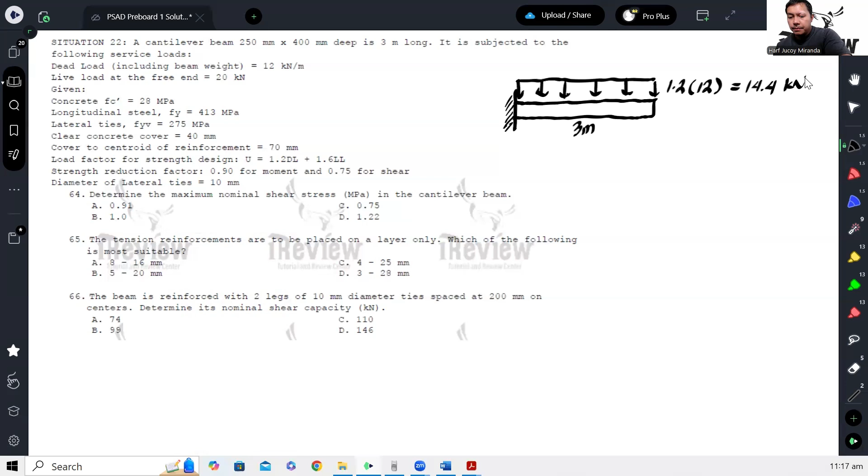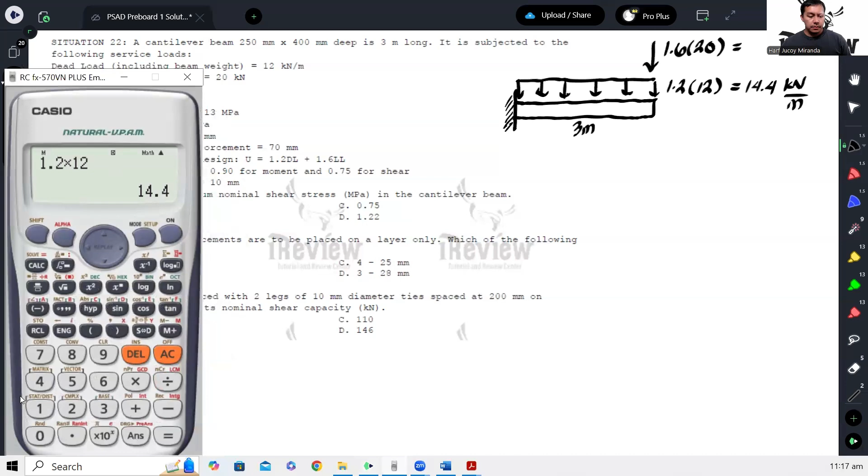Then there's a live load at the free end. So again, let's factor it, 1.6 times 20. Okay, so that gives us 32 kilonewtons.

So for the first question, number 64, determine the maximum nominal shear stress in the cantilever beam. So if we look at it, what is being asked, maximum nominal shear stress. So that means we need to compute the shear stress, which is basically the...

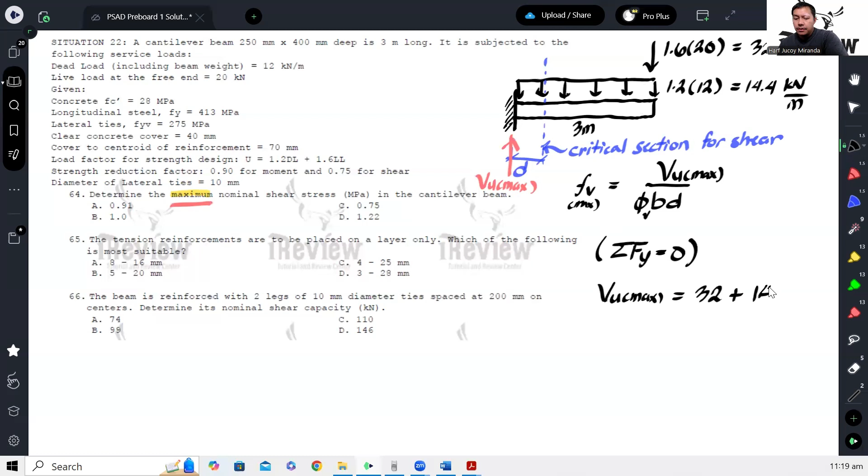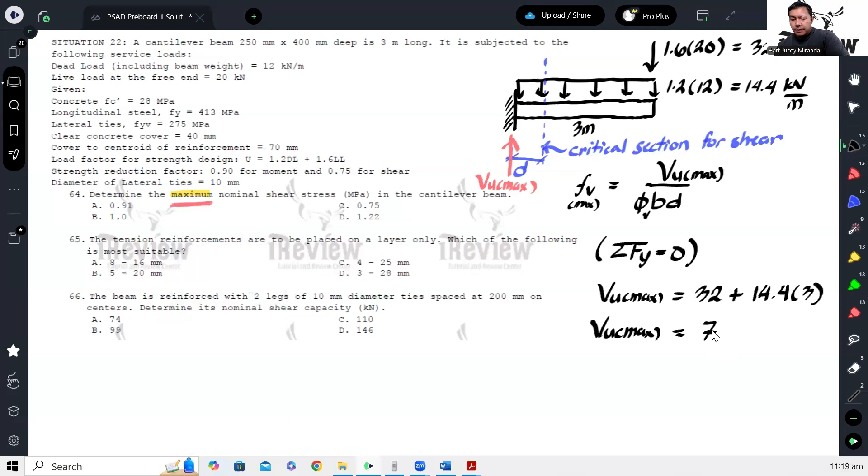Basically, we'll just sum up the forces on our beam. So we will have VU maximum equal to 32 kilonewton plus 14.4 times 3 meters. Okay, and that should give us...

75.2 kilonewtons. So therefore, our maximum shear stress is equal to 75.2, let's convert to Newton so the answer is in megapascal, over 0.75 times B times D. Now for our D, the cross-section, according to the problem, the height is 400 and the base is 250.

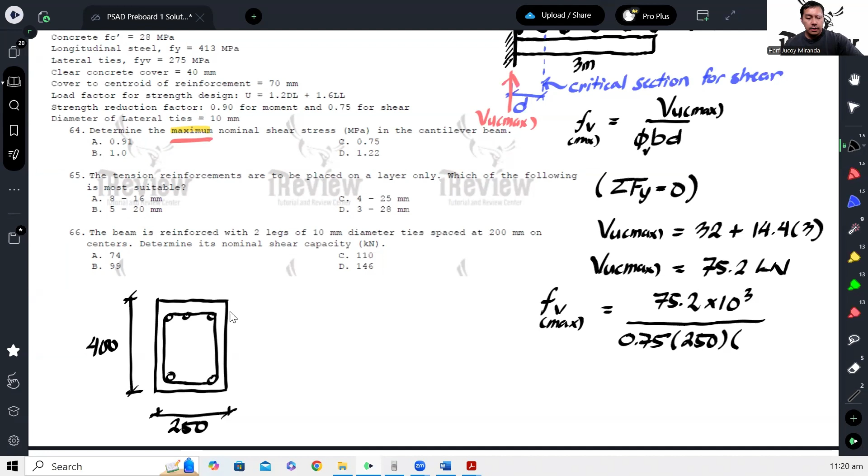Okay, and because this is negative bending since it's a cantilever, the tension side is at the top. So imagine that's the reinforcement there. So the effective depth will be measured in this manner. We'll remember that effective depth is always measured from the extreme concrete compression fiber.

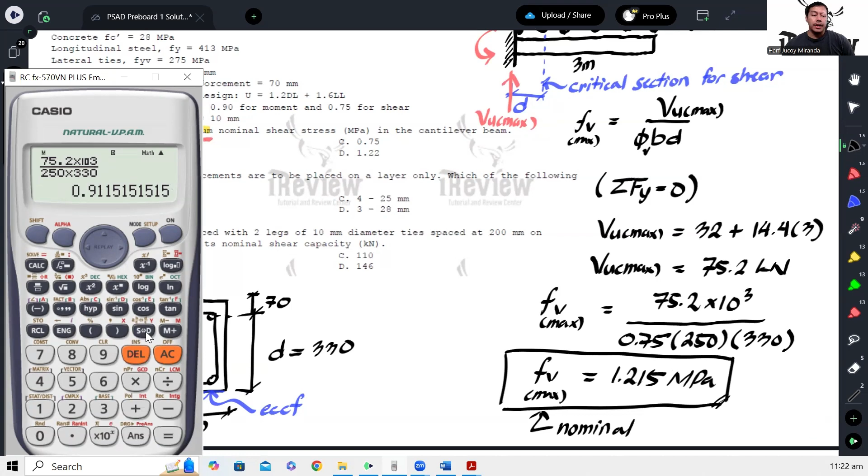And that gives us 1.215. So this is nominal, okay, nominal. If what's asked is ultimate, you just remove this. So that's the ultimate shear stress, 0.91. This one is the nominal.

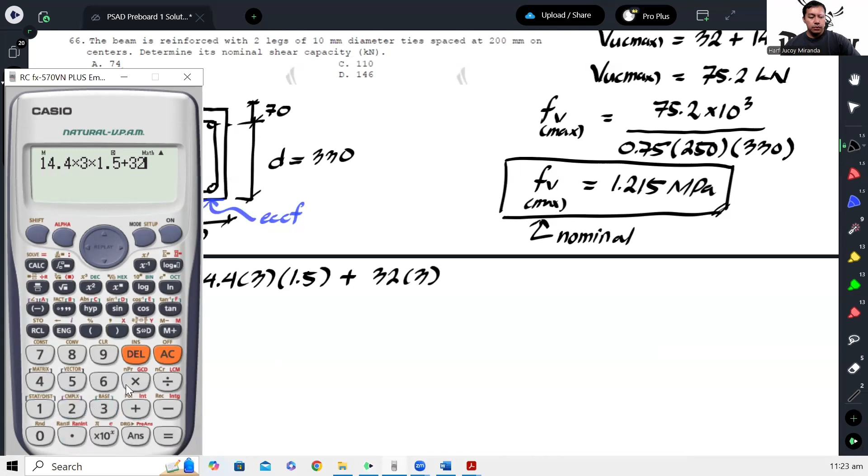So this gives us an ultimate moment of 14.4 times 3 times 1.5 plus 32 times 3. Okay, and this gives us 160.8 kilonewton meter.

So now that we have MU, this should not exceed our design capacity, which is phi Mn. The phi given is 0.9 according to the problem, which means our approach here should be tension control. So tension control, all right, how do we solve that?

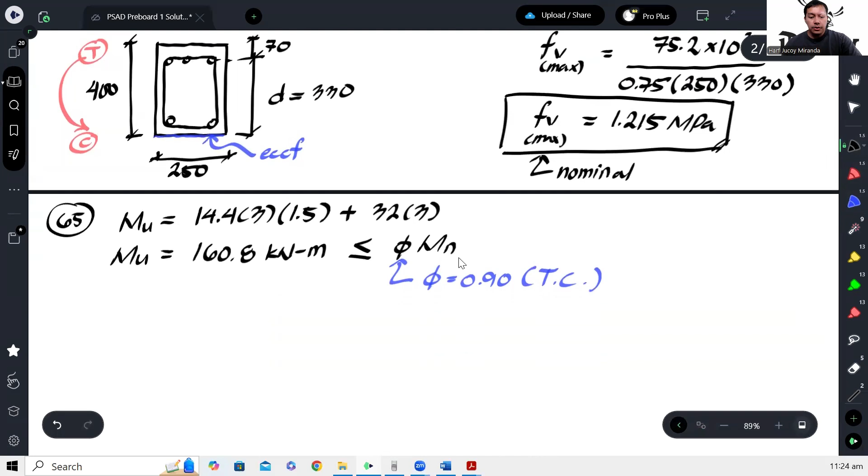Going back to the basics, here is our cross-section, let's say here is the steel bar. Because here is the neutral axis, and here is the compression side, here is the depth of the compression block, let's call this A. This becomes our compression, which is 0.85 FC prime. Then here is the tension of the steel, T, and here is C.

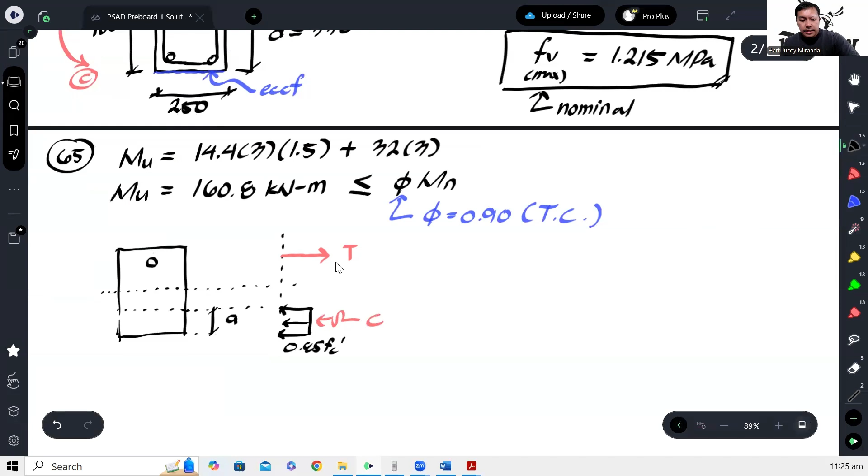So our first goal is to find the depth of the compression block. The distance is always A over 2, so D minus A over 2. To calculate the depth of the compression block, we take moments about T since we don't have a value for T yet. So we take moments here, and C times this moment arm gives us the nominal strength. So the nominal strength formula becomes C times D minus A over 2.

What is C? C is the stress times the area of concrete under compression. That area is B, which equals 250. So we have, up here, 0.85 FC prime times the area, which is A times B, times D minus A over 2.

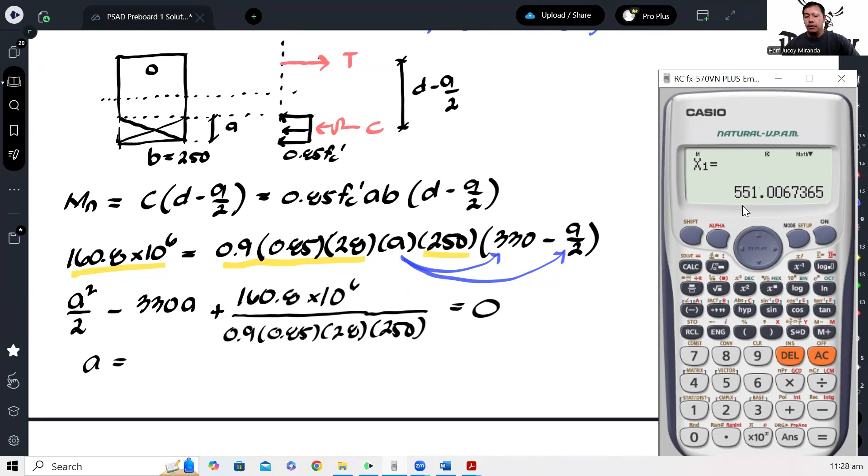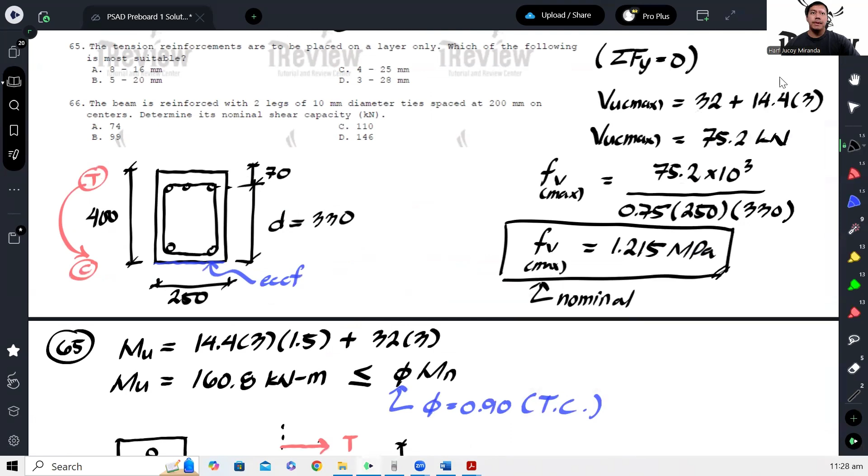So we can now solve for A. There will be two values since it's quadratic, but only one we accept. Using the quadratic formula: 1/2 negative 330, plus or minus 160.8 million over 0.9 times 0.85 times 28 times 250. Our answers are 551 and 108.99. We won't accept 551 since our depth here is only 400. So the solution is 108, or approximately 109, let's just use 108.99.

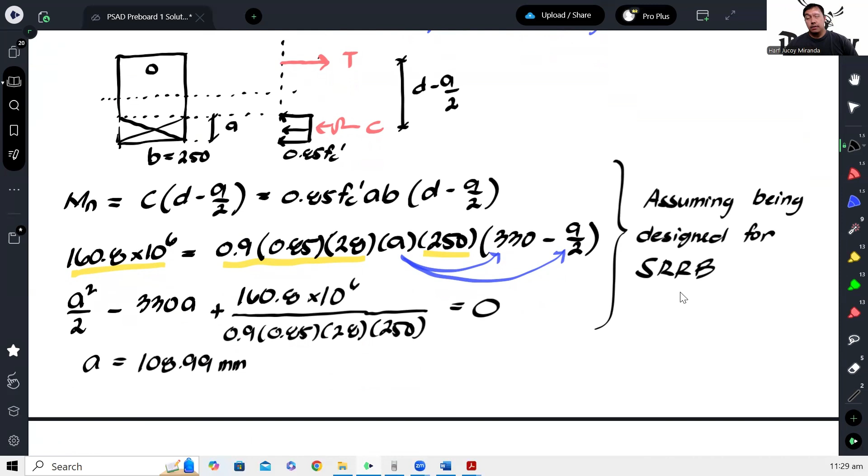Or the easiest way is to just compare it to the maximum depth of the neutral axis, which equals 3/8 of the effective depth. This is if you are designing for tension control and steel yields. The other one, 3/7, is if you are only designing for steel yields, but that's not tension control—that's actually transition failure, or should be the transition zone.

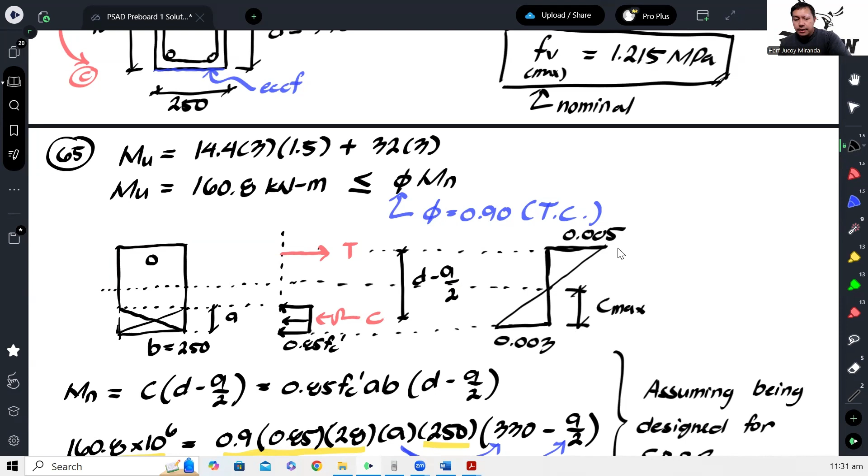So kapag nag-ratio and proportion tayo, effective depth pa rin to. Kapag kinonsider mo itong triangle na to, tapos i-compare mo sa triangle na to, they are similar, kaya by similar figures, we will have yung yellow muna, Cmax over 0.003 equals yung green naman ay D over 0.005 plus 0.003. Kasi 0.003 plus itong length na to, ito rin yun, so 0.008. Ilalabas yung Cmax ay 3/8 of the effective depth.

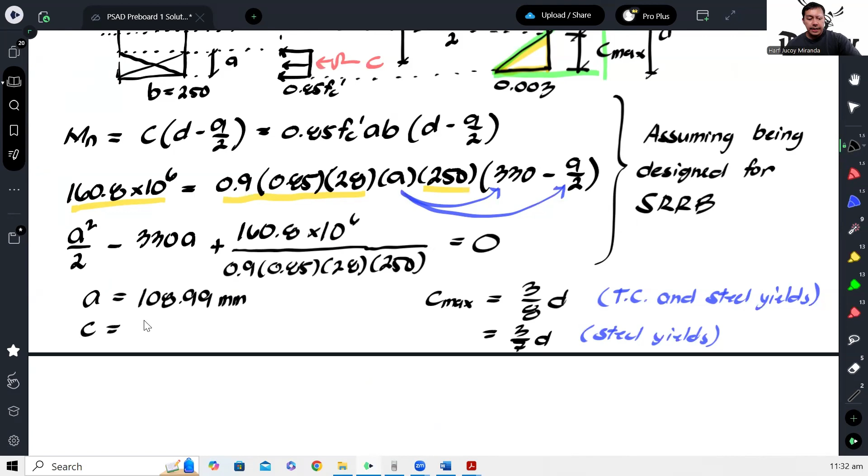Ayan yun, no? Ibig sabihin, check natin. Convert muna natin ito sa C. Para ma-convert, ang relationship niyan ay A over beta 1.

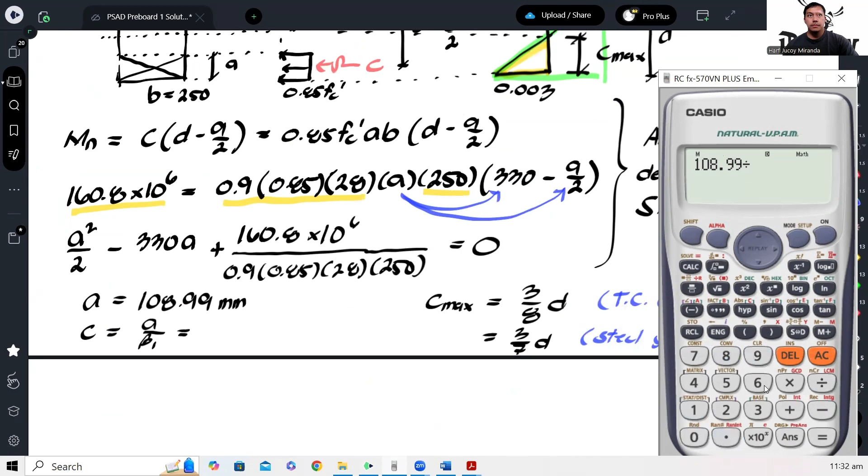Yung beta 1 natin is 0.85 kung 28 megapascal yung FC prime pababa. So 28 naman, so 0.85. So therefore, yung C natin magiging 128.22

millimeters. Tapos computin natin yung Cmax. So Cmax is 3/8 times effective depth na 330. So lalabas is 123.75. Okay? Which is mas malaki, no?

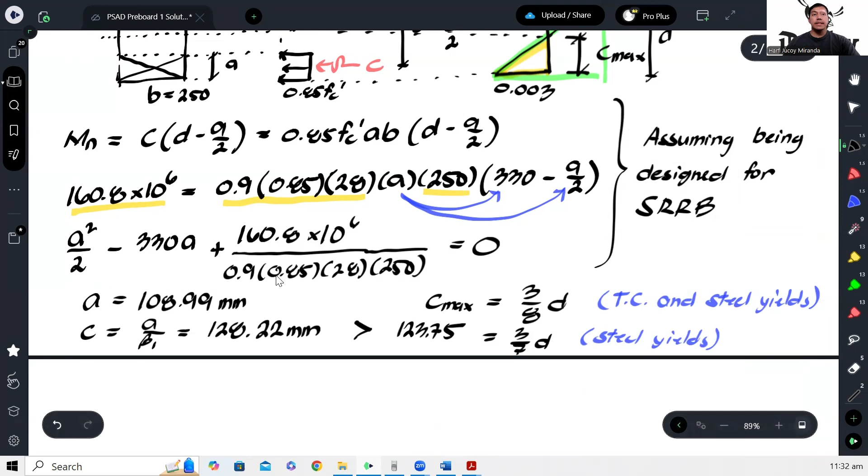Etong C natin, so lumagpas na tayo. Dahil lumagpas na tayo dito, since C is greater than Cmax, we will have to design this as doubly reinforced rectangular beam. Ibig sabihin, kailangan natin i-design as doubly reinforced.

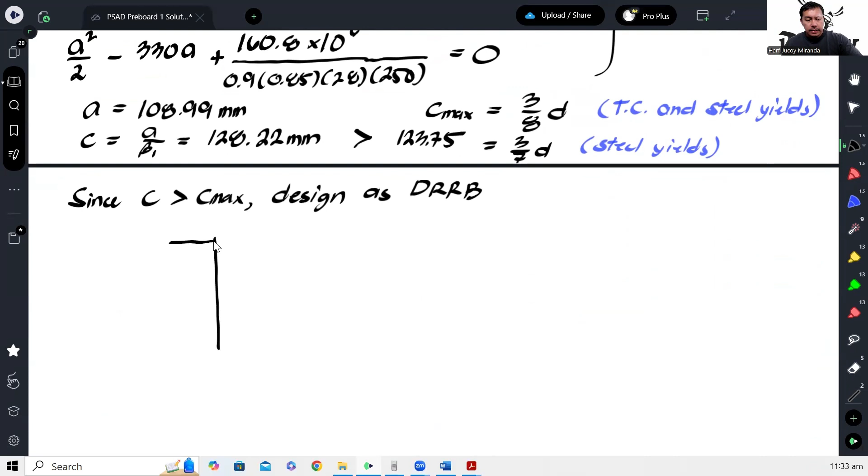Alright, paano yun? Ganito lang yan. Natatandaan natin, di ba ito yung mga bakal natin? So mayroon na tayong bakal dito ngayon.

Ang tatandaan natin is dapat yung total moment capacity nito, okay? Yung total ay equal sa moment capacity nung, tawagin ko to na AS1, na tawagin din natin itong MN1. So ito parang singly reinforced at maximum condition.

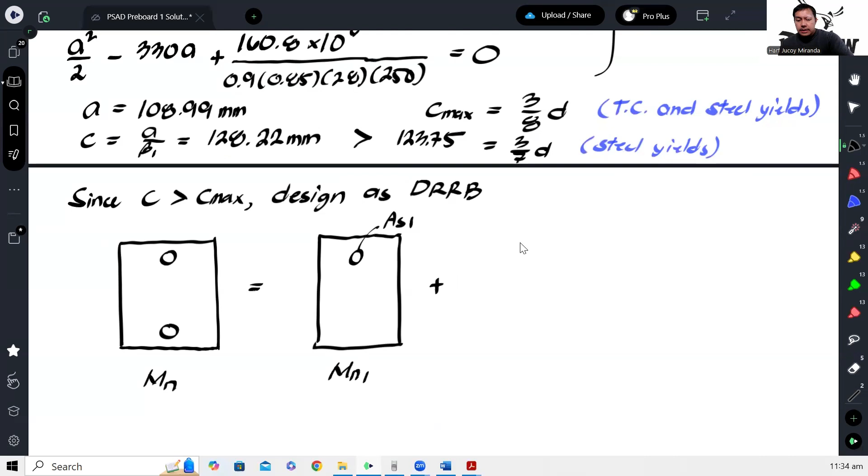Plus yung bakal lang, okay? So ito tatawagin natin na AS2, tapos ito tatawagin natin na AS prime. So itong MN2, ito naman yung capacity ng bakal lang. Kumbaga additional na bakal na ilalagay natin because we are designing it sa doubly reinforced.

Kumbaga ito, lagay natin, ito yung capacity at maximum condition for SRRB. Ito naman yung additional steel capacity. So dapat pag pinag-add to, equal lang siya dun sa total nominal capacity.

Okay, so ang pwede nating unang gawin is makompute na kagad yung AS1. Kasi itong AS1 na to, ano lang to, yan na yung AS max sa SRRB. Madali na yon, kunin na lang natin yung maximum steel ratio. So we have AS1 is equal to AS max, which is equal to rho max times BD.

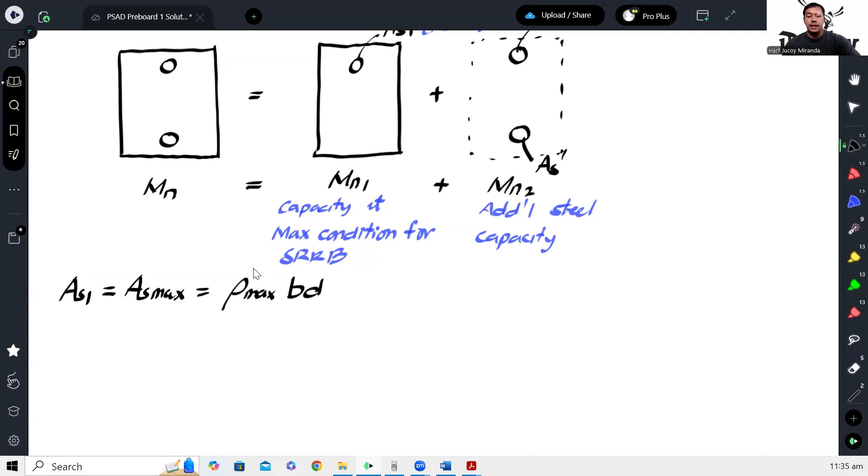Pero ano yung rho max? Ano yung maximum steel ratio? Well, may formula, no? Maganda kung kabisado na, pero kung hindi, madali lang naman i-derive. Bali,

from C is equal to T, no? Ang C, 0.85 FC prime AB. Etong T is AS FY. FY na to kasi, gusto natin at maximum condition eh, so at maximum condition, steel yields.

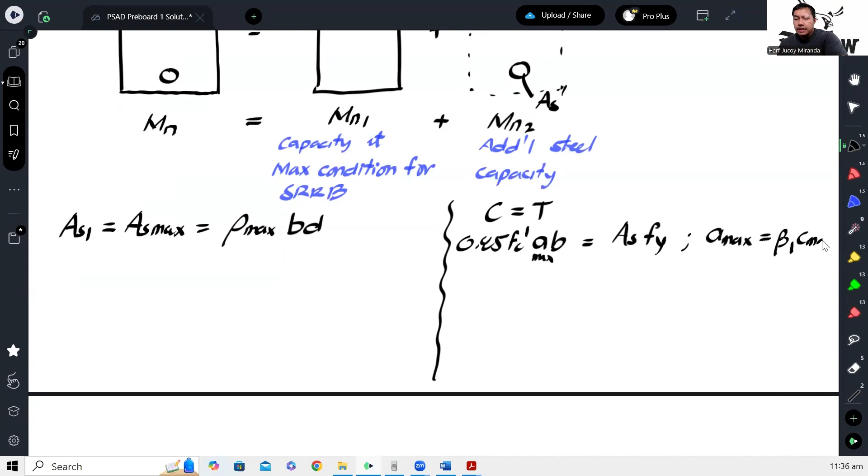So ito, gagawin nating A max. Ano ba yung A max? Di ba ang A max ay beta 1 Cmax. Kaya ano ba ang Cmax? Discuss natin kanina, na yan ay 3/8 ng D.

So therefore, yung A max ay beta 1, 3/8 of the effective depth. Okay, substitute natin: 0.85 FC prime, 3/8 D, beta 1 times B is equal to AS FY.

Tapos ang goal ko, yung steel ratio ay AS over BD, no? Ibig sabihin, kapag dinivide ko itong dalawa, ito tsaka to, doon, magkakaroon ako ng AS over BD. So ganun yung gawin natin.

So we will have here AS over BD. Tapos ang maiiwan dito ay yung 3/8, tapos 0.85 FC prime beta 1 over FY. So ito ngayon yung formula natin na lumalabas, ito na yung rho max. Okay, so lumalabas yung rho max is simply 3/8 times 0.85 FC prime beta 1 over FY.

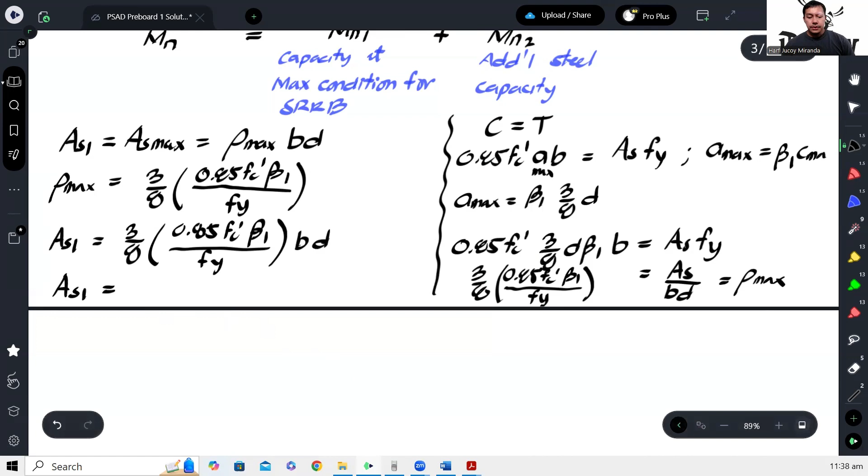So in short, kapag binultiply natin ng BD yan ay AS1 times BD, yan ay FY, AS1. So kumpitin natin: we have 3 times 0.85 times FC prime times beta 1 times BD. Ang B ay 250, ang D ay 330 over 8. FY is 420, tama ba?

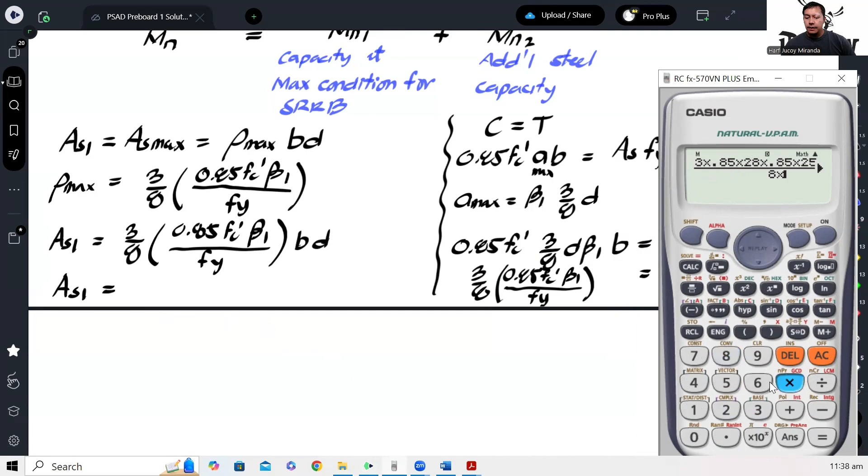FY, 413. Okay, that's it, no? So our steel area,

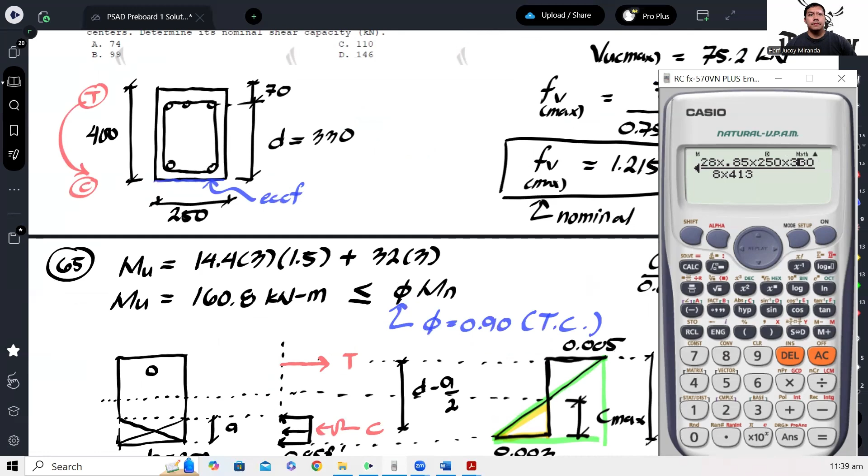check na lang, check natin. 3, 0.85 FC prime beta 1, 250 times 3, yung B natin ay 250. Ayan, 250. Tapos yung FY natin, 413. Okay, so our AS1 would be 1,515.41.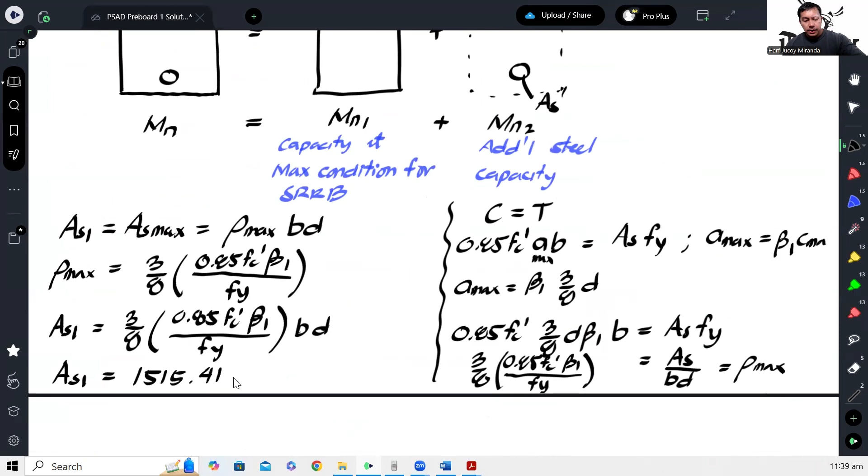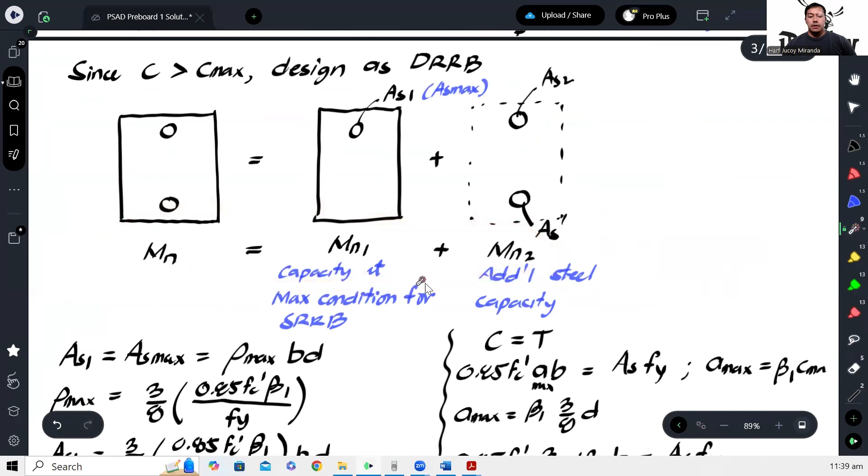So MN should be equal to MN1 plus MN2.

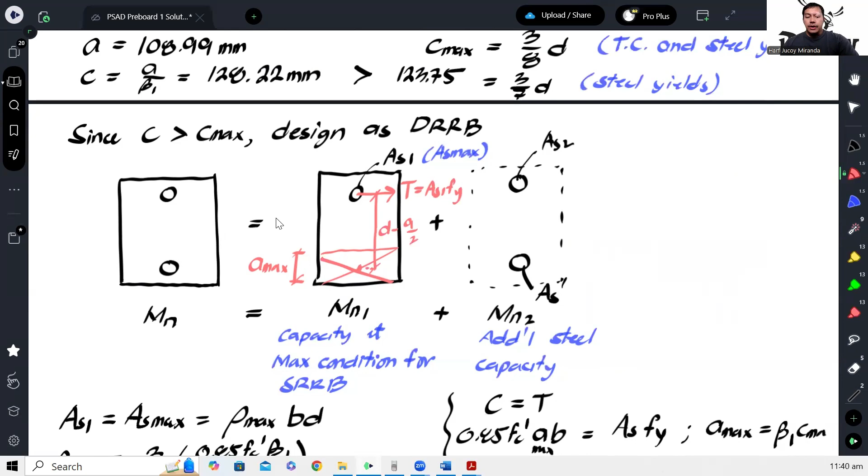So we will have AS1 times FY, which automatically yields, times D minus Amax over 2.

Plus, what is MN2? MN2 is this one. This also has tension - compression CS, then tension 2, T2, and T1.

So same thing, we'll moment about the compression again. Then the distance isn't D minus A over 2 anymore, it's D minus D prime. D prime is the distance from the bottom, which is 70 mm.

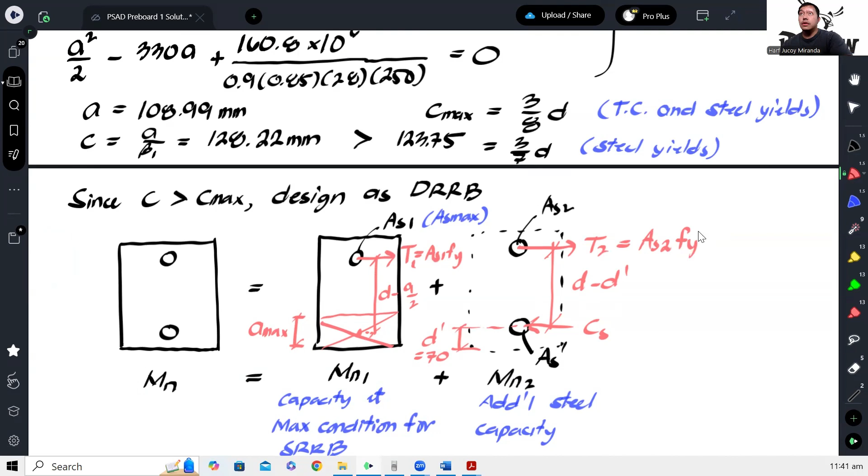We'll add that in. So we will have AS2 FY times D minus D prime.

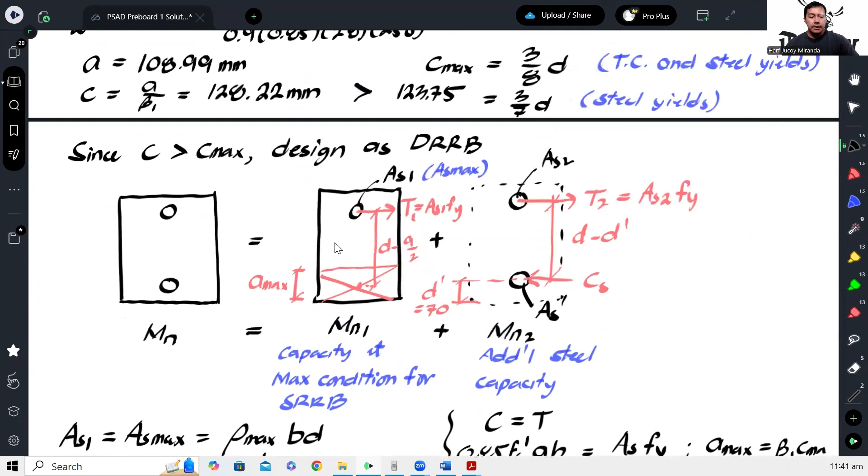Then what is MN? When we equate it to MU, it becomes: MN will be equal to MU over phi, so we just divide by phi. So 160.8 over 0.9, then we convert to Newton-millimeter.

So therefore we apply: 1515.41 times 413 times 330 minus the Amax we had earlier.

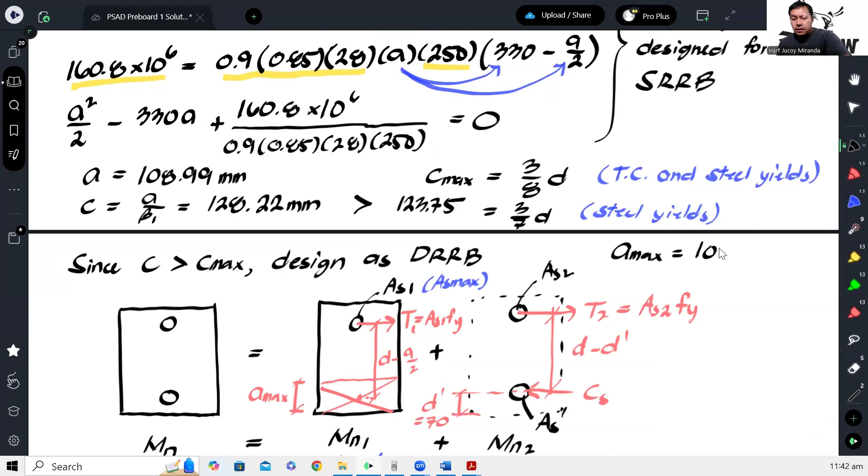So 105.19 over 2, plus AS2 FY, and then D minus D prime, so 330 minus 70.

So all of that gets equated, and then we solve for AS2. So we have 160.8 over 0.9 times 1 million

equals 1515.41 times 413 times 330 minus 105.19 over 2, plus AS2 times 413 times 330 minus 70. Shift solve, and this gives us 47.02

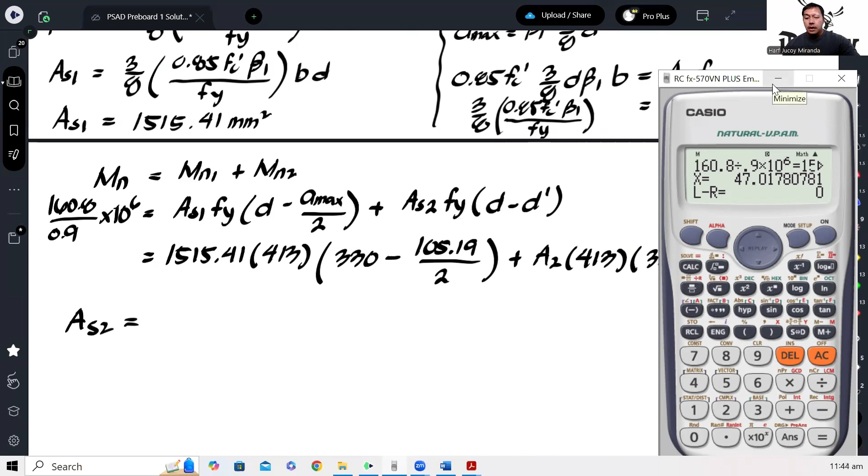millimeters squared - this is our additional steel. So therefore, our total steel for tension is AS1 plus AS2, giving us 15... plus 1515.41, so that's 1562.43 millimeters squared. This is now the total steel we'll use on the tension side.

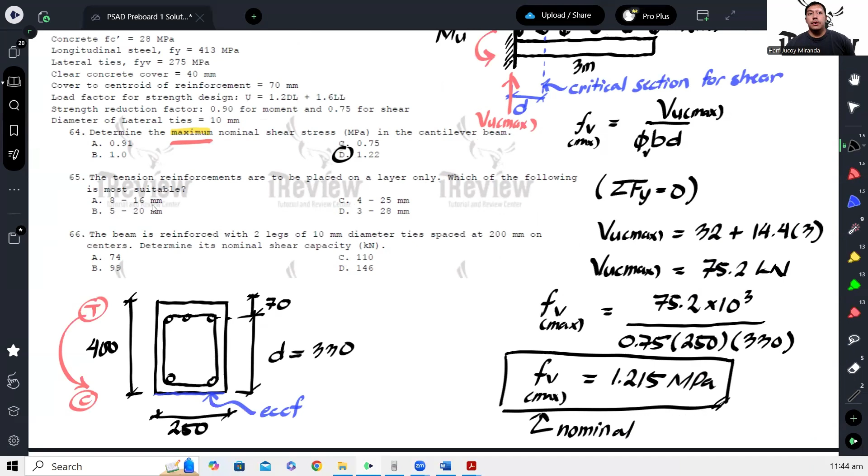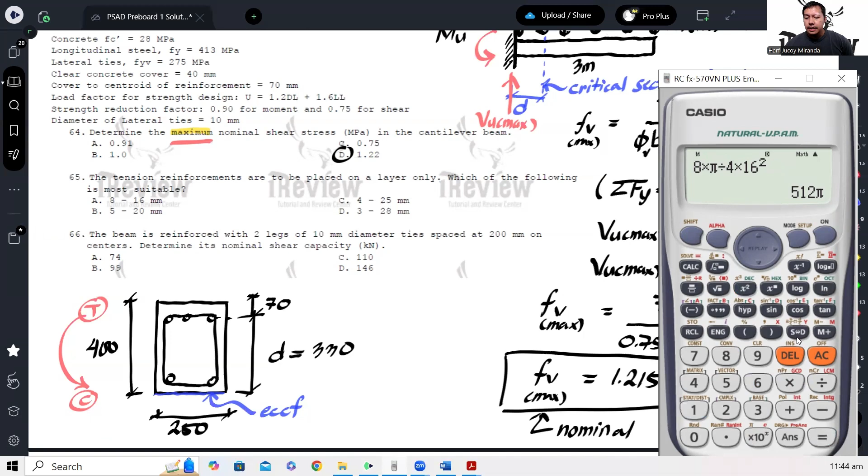So the problem says if the tension reinforcement is placed in one layer only, which is most suitable? Let's check each option in terms of area. Let's compute the area for option A: 8 times pi over 4 times 16 squared, giving us 1,608. Our requirement is only 1562.43. So option A works in terms of strength.

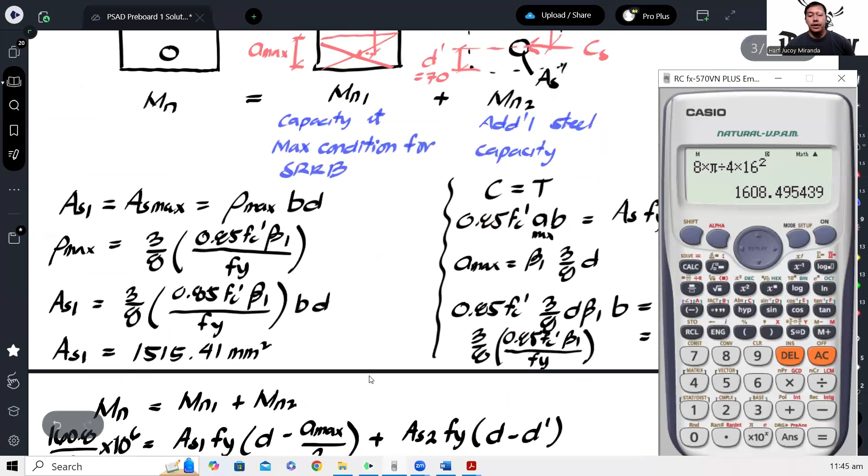Let's check option B: 5 pi over 4 times 20 squared. Still larger, so option B works too.

Then option C: 4 by 25, giving us 1963. So option C also works in terms of strength.

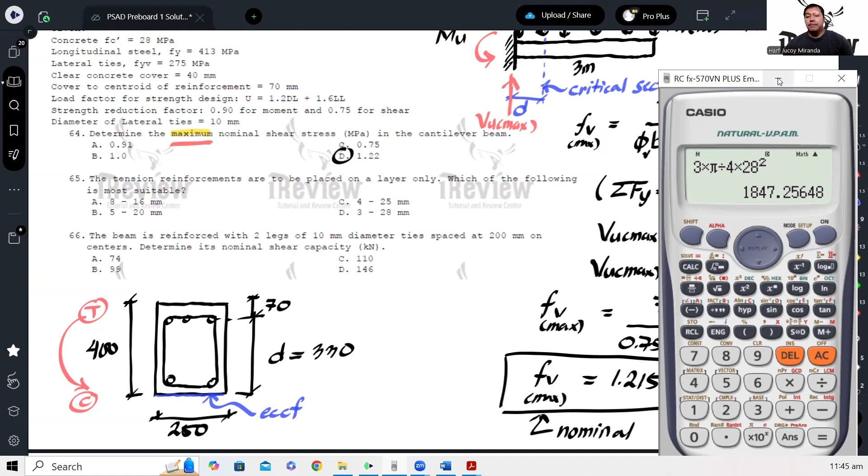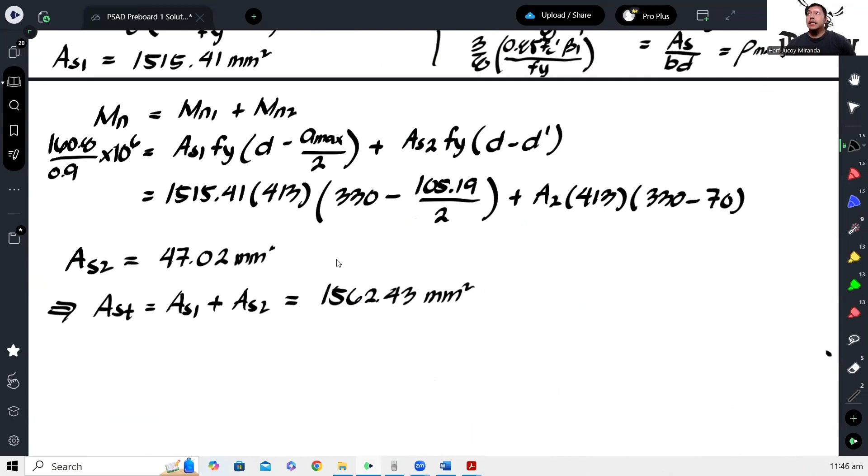So how do we choose? To choose, we need to check the required spacing of the longitudinal bars, since option A might not fit in one layer - we need to check if it fits.

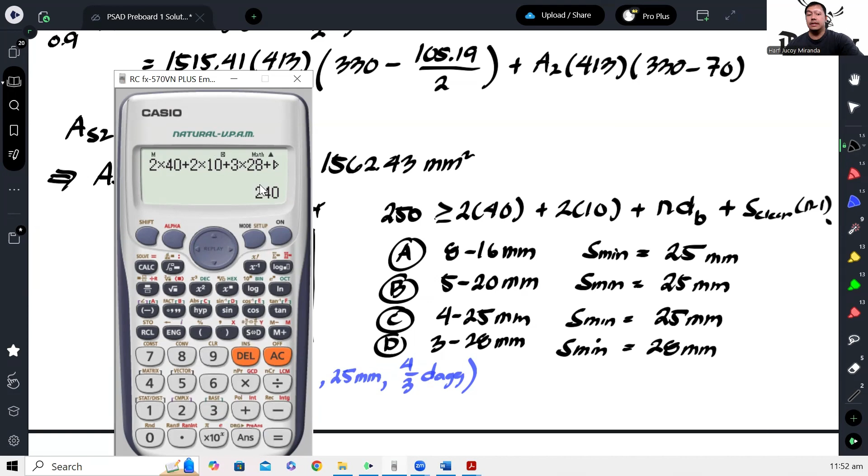Let's check. 3 bars of 28mm, and the minimum clear spacing is 28, with only 3 bars. As you can see, it's less than 250, so it passes our code requirement. Therefore the correct answer is letter D. So our answer for number 65 is letter D.

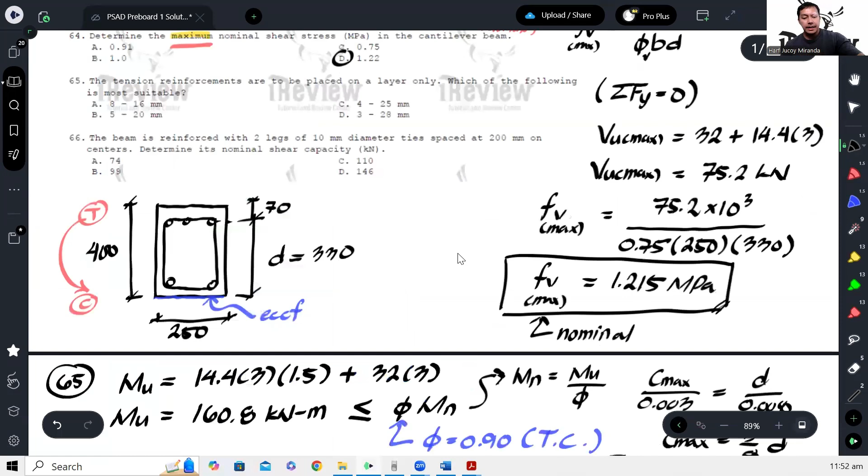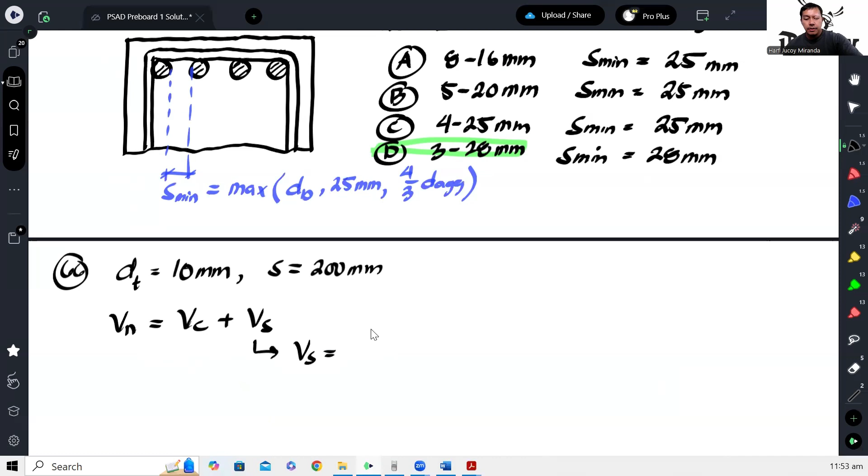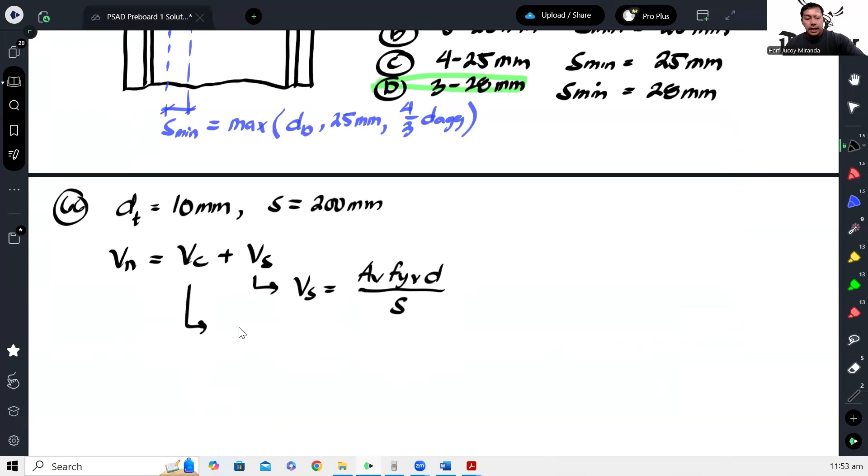For number 66: the beam is reinforced with 2 legs of 10mm diameter ties spaced at 200mm on center. Determine its nominal shear capacity. This is easy - the spacing of the 10mm ties is 200mm, and we need the nominal shear capacity, which equals the shear provided by the concrete plus the shear provided by the steel. The shear provided by the steel equals AV times FY times D over spacing. The shear provided by the concrete for flexure, using simplified computation, is 0.17 lambda square root of FC prime, times B times D.

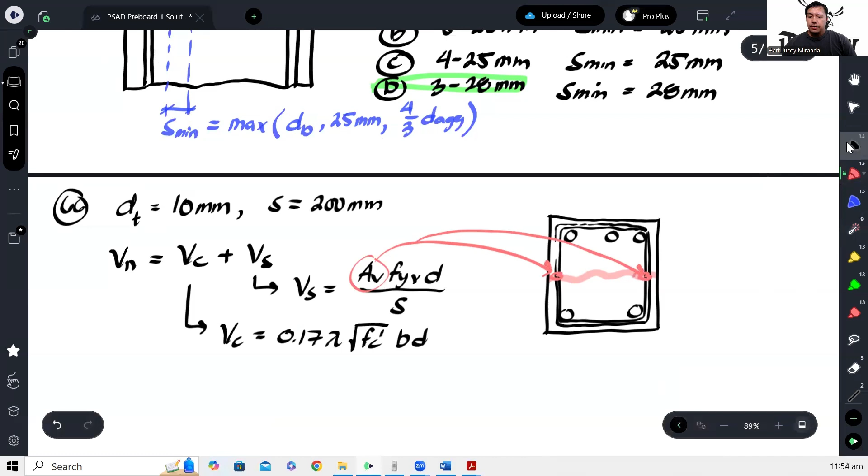Let's compute VC first: 0.17, lambda for normal weight concrete is 1, square root of 28, B is 250, effective depth is 330. We divide by 1,000 to get kilonewtons. 0.17 times square root of FC prime times 250 times 330 gives us 74.21 kilonewtons.

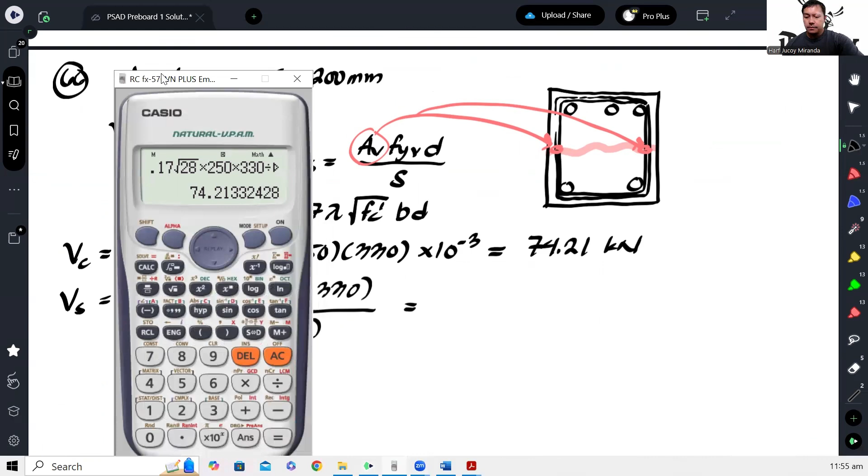And then for the steel, we have 2 times pi over 4 times 10 squared - that's AV. Then FYV according to the problem is 275. Effective depth is 330, over spacing of 200, then divide by 1,000 again to get kilonewtons. So 2 pi over 4 times 10 squared times 275 times 330 over spacing gives us 71.27.

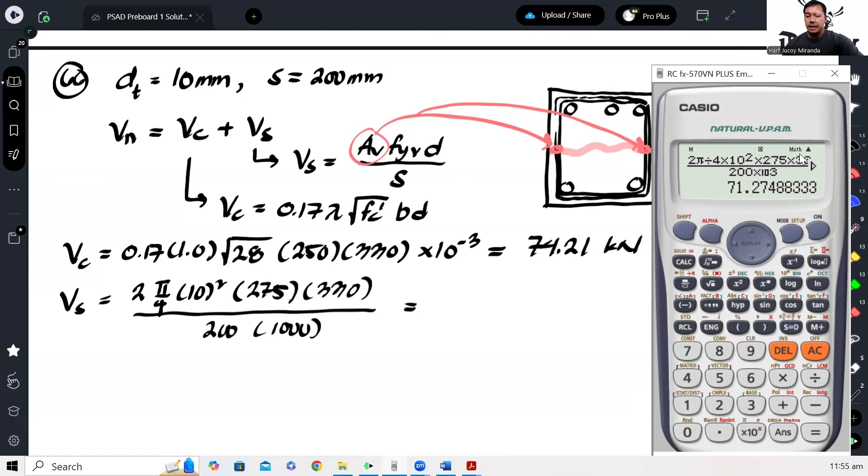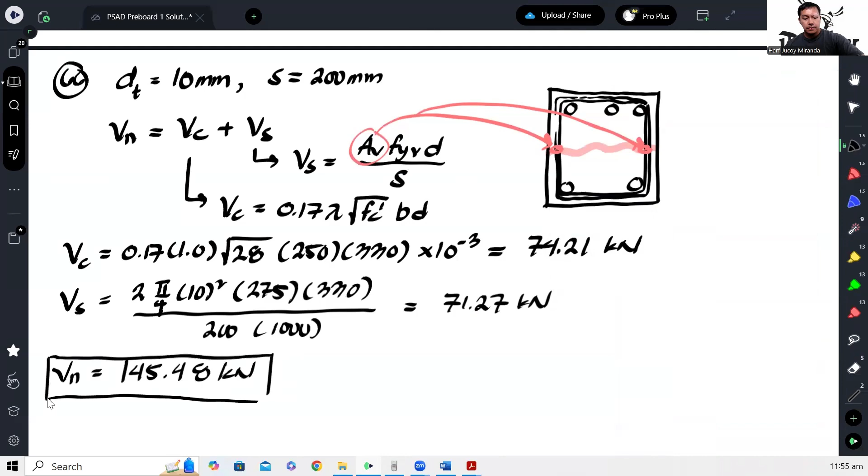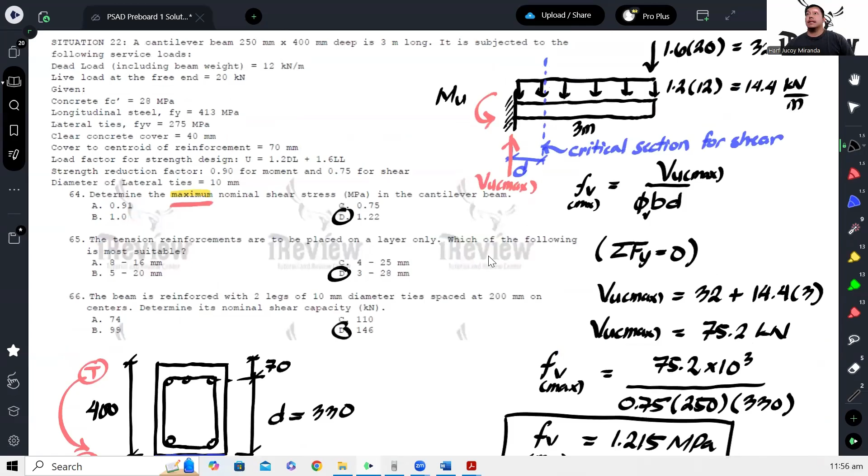So therefore our nominal shear capacity in this scenario would be 145.48 kilonewtons, and that is letter D. So that's it for this situation.